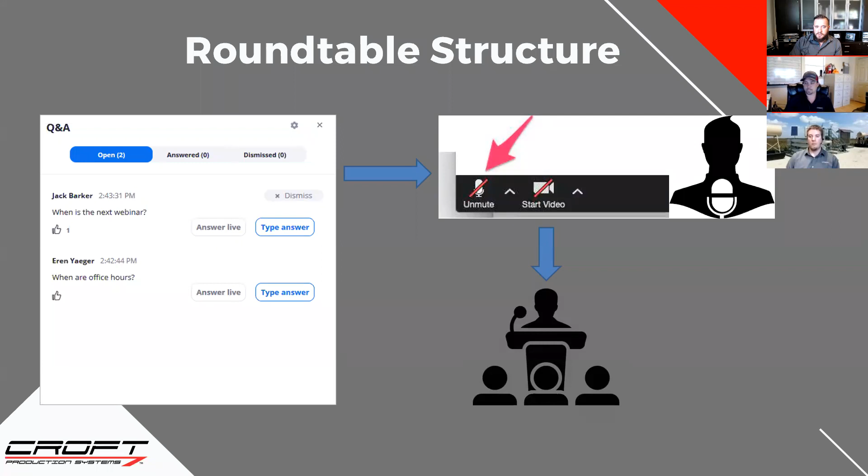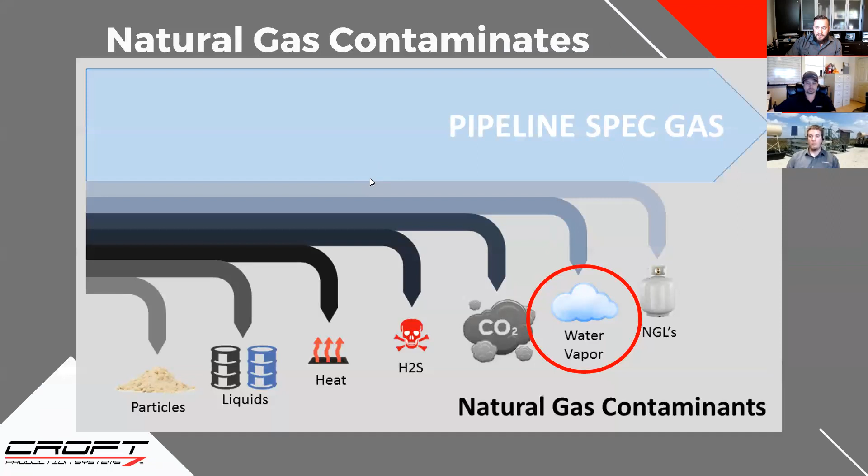The big focus today, out of all the pipeline spec contaminants that we're looking at, is the water vapor - the dehydration portion of it.

Now, the origin story - I'm going to talk a little bit about that because it actually comes from my dad, and I could riff on him a little bit stronger than most. So what he did is he was a consultant. He owned multiple wells, and he was a consultant over 100 wells. So he owned and operated as a consultant.

There's got to be a better way of doing this. At that point, my dad was trying to find a better way of dehydration where it didn't require burners, pumps, all the headaches that go along with it.

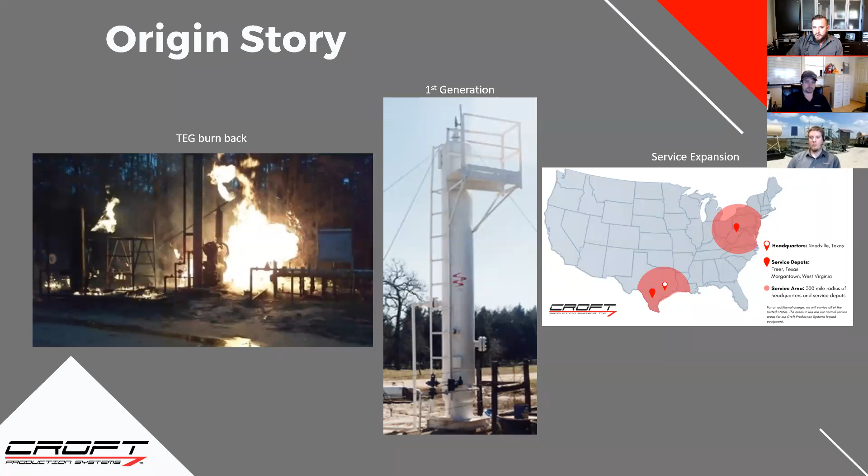So there's different varieties. The trailer one was a fun project, and we're building multiple of those. So yeah, talk a little bit about that.

Yeah, the trailer one, that was an interesting fuel gas project. Up north, the gas quality is really good, and can be used directly into natural gas powered engines. So they just need to make sure that it's dry so that when they run it through the regulators, it doesn't freeze up. These units were designed for drilling rig fuel and dual fuel frac spreads. The trailer would be brought in, it would clean up the gas to power the generators for the drilling rig, then the drilling rig would leave and the frac spread would come in, and we were dual fueling the frac spread to displace diesel costs, which is a great way of saving a lot of money on diesel. But these systems work really well for fuel gas.

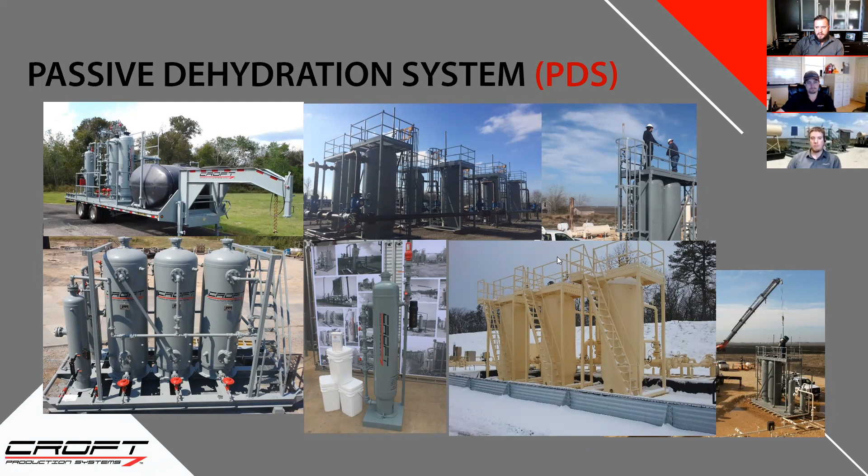Well, let's go into how it works. Yeah, Chris, if you can kind of take the lead on that, and then Eric especially on the service side, because you're the one that has to chew on it most of the time.

Yeah, so the basic function is we're filling up a vessel with a dry pellet. It's about the size of a large almond, and it's made of a mixture of different salts. It's not table salt—there's a little table salt in there, but there's different kinds of salts, and all of the salts like to absorb water. The kind that we use likes water more, but basically we're sucking the water moisture out of the natural gas with these salt pellets, and the salt is going to absorb that water. It's going to start dissolving the pellets, and it's going to collect as a brine water solution in the bottom, and the gas basically comes in the bottom wet and leaves the top dry.

Now the product that we have is formulated to output about 2 to 4 pounds at higher pressures. So when the gas comes in at whatever water concentration it is, it's going to leave at around 2 to 4 pounds per million of water leaving the system. Basically, it's just going to keep eating away at that dry bed of product, shrinking down as it gets eaten up. And then the service team comes and refills it, normally on a 30-day service schedule, to top it off as however much is needed.

But they're very simple systems. There's nothing to turn on or start up or really anything. As soon as the gas starts flowing through there, it goes through the system. Basically, once you've purged out all the gas out of the system, you're drying. And it's very quick, very simple systems. And as long as you have EnviroDri in there that hasn't been contaminated, then you're going to be drying your gas.

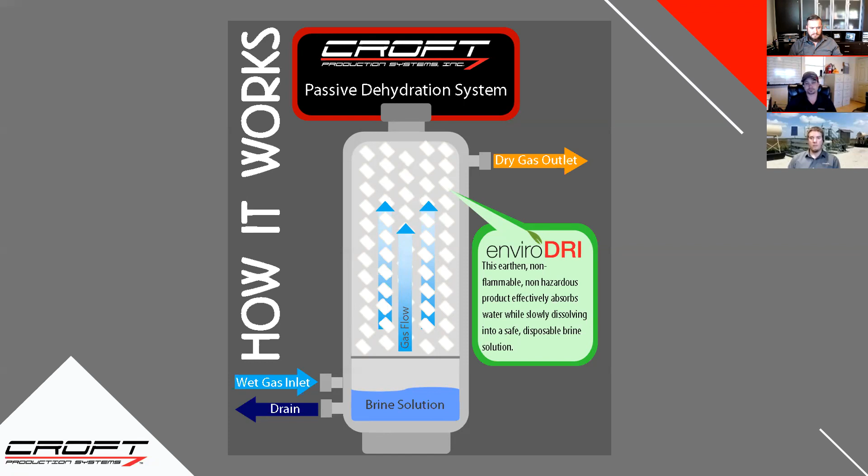That's awesome. So let's go deeper into the actual desiccant itself. I know earlier you were talking about some salt product being in there. We have a lot of clients that just call them salt beds. Can y'all explain a little bit about what it actually is in EnviroDri, and that it is salt, but not everything is salt? Yeah, so it's a mined salt that's refined. And it's mixed with a couple different kinds to give us the blend that we're looking for. We also have it shaped to what we feel is a really effective shape to reduce things like channeling and bridging within the system. So that gives it kind of like an oval shape, round pellet that the gas will go through.

The real benefit of it is that it really only wants to absorb water. So that's the only thing that's going to dissolve the actual salt is water. We've gotten slugged completely with oil, and we just have to drain the system out and it's ready to dry again. That's not going to actually dissolve the pellets unless there's a bunch of water in the oil, then you're going to actually have some of that dissolved. But it really is just looking for the water.

So if the gas is coming in partially dehydrated, it's only going to react to however much water is coming into the system. Your consumption is completely based on the water going into the system. If your volume gets cut in half, your EnviroDri usage gets cut in half. If your temperature gets cut in half, your EnviroDri usage will get cut in half. So it's very simple in the way that it works.

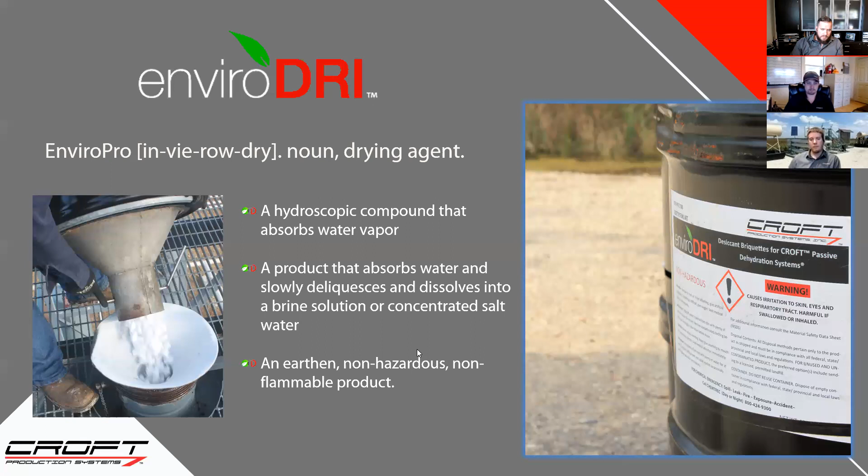No, that's good. And I'm going to move on to the pros and cons. These are the quick highlights of pros and cons. Chris, can you go over them?

Sure. The main pro is it's very simple. Basically, you open the valve, flow gas through it, and you start drying. Usually it's about 15 minutes before we pull a tube, just to make sure all the gas gets out of the system. Normally we're around 6 to 8 feet per minute through the vessel, so it can take a few minutes just to get through our PDS vessel.

But yeah, they're super simple. It's really just the vessels ahead of it, and then the dump system to dump the liquid off. There's no burners, no pumps, no temperature controllers, no back pressure regulators, no low pressure separation systems, no filters, unless you have a coalescing filter ahead of it. The simplicity compared to a glycol unit is night and day. The simplest of our systems is just a single vessel with a dump timer and a dump valve, versus a glycol unit with all its pumps, controllers, and everything.

The lifespan of the vessels is great, it's just a solid high pressure vessel. Our entire lease fleet is 1440 pressure rated, so they're good 25, 30-year life vessels. Even though we have salt inside the vessels, we do not see excessive corrosion inside the systems. We do periodic UT testing depending on the life of the vessel and how long it's been in the fleet, and that salt does not cause any sort of excessive corrosion inside the systems. We use standard carbon steel vessels and don't see any problems. The big problem is if you have oxygen coming in, but that shouldn't be an issue, or else you're going to corrode out everything anyway.

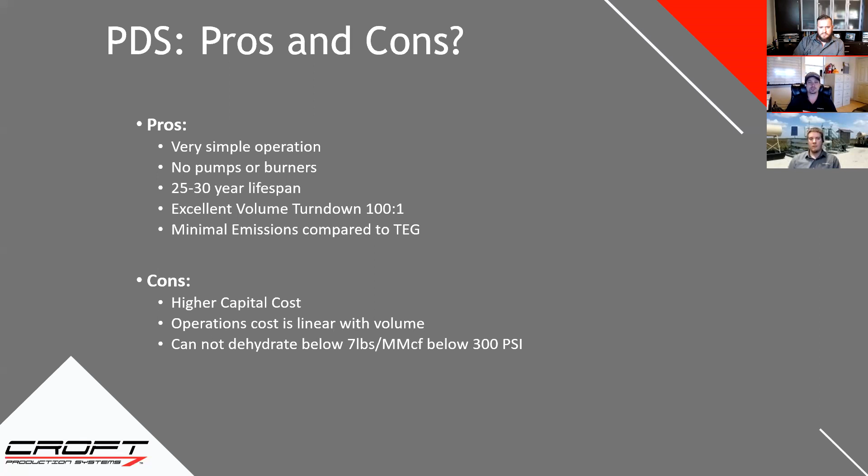Well, it leads back into our desiccant myths. These are the 3 main areas we see a lot, because we get a lot of clients who say, I've dealt with these salt beds since the 1970s, 1980s, and this is what I have. So in dealing with these desiccant myths, Chris, do you mind reading these off and giving your rebuttal? Yeah, so the first one you hear a lot is that they're only really good for low volumes.

Part of that is because the biggest market for these was fuel gas. So if you haven't seen ours, but you've seen somebody else's desiccant system that uses a consumable desiccant, what you've probably seen is a little small fuel gas cylinder on a line heater or GPU or something like that. That kind of gave people the idea they didn't want to change them out that often - they were just a little more unsure of them. So it gave rise to the idea that they were really only good for low volumes of gas.

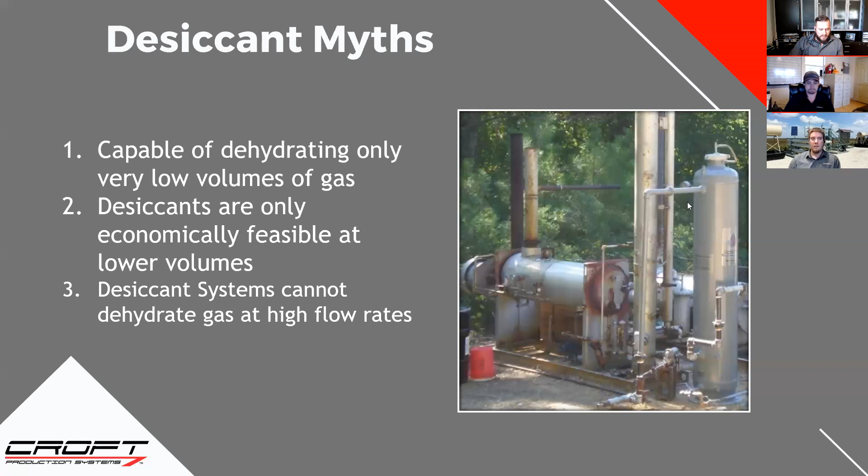That's what I want to do, go into methane emissions, because that's one of the key trends happening right now. Everyone's pushing for ESG, environmental and social governance programs and initiatives, being the Paris Climate Agreement, trying to get back on schedule to meet it. So I started researching ESG, figuring out how people are even gauging the initiatives they need to focus on.

They kept referencing the EPA. So looking at the EPA, whether you believe the numbers or not, this is what they're pushing out there: 12 billion cubic feet of methane being released from dehydrators and pumps. Now pumps, in what sense? I don't know, is that the pumps on the TEG, or chemical injection pumps? They're not really specifying. But I wanted to bring attention to this, because this is what everyone's having in the back of their mind. So politicians, regulators, people legislating, this is what they're seeing as what they need to be focusing on.

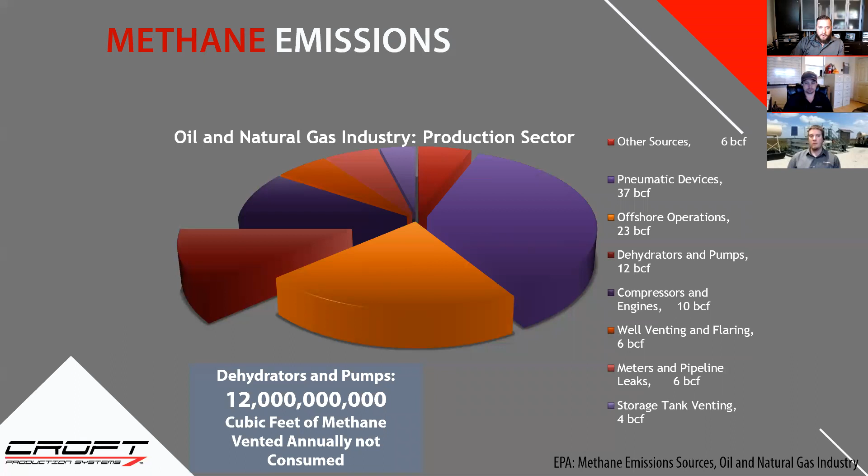So whether it's right or wrong, this is what they're starting to believe. Now, we build TEGs, we recertify them, we service them, so I don't want to talk too badly about them, but I do want to go into the issues, the inefficiencies from them. So Chris, can you go into that, and then Gorka on the service side?

The emissions from the glycol systems, all the bad stuff comes out of the still column. The burner is just a burner, burning the gas. The efficiency of the burner could be 95, 98%, whatever that style of burner is, so you do have a little bit of methane emissions from that, but overall that's not a big number. You do have your fuel usage equivalent to your burner, and your circulation rate can be kind of high—you could have 5 to 10 MCF a day depending on the size of the glycol system, and 2, 3, 4, 5% of that methane just getting emitted because it didn't get full combustion.

But the main emissions come off that still column—that's assuming your flash separator is going someplace safe. If you don't have a flash separator, you have a lot of methane getting emitted off your pumps, but all the bad stuff is in the still column, because it got captured by the glycol.

Your benzene, your toluene, your ethyl benzene—these are all hydrocarbons in the gas. Glycol likes them, so it grabs them in the tower and takes them to the still column where they get boiled out. Benzene, toluene, that's basically paint thinner—it's a hydrocarbon light enough to be in the gas but heavy enough to get captured by the glycol. When that gets boiled out, if you don't have a good BTEX unit to capture and remove them, sending them someplace other than venting to atmosphere, like a combustor, or liquefying them into a tank, then you have an emissions problem. The standard glycol or BTEX system, just the ambient cooled ones, are just liquefying what they can.

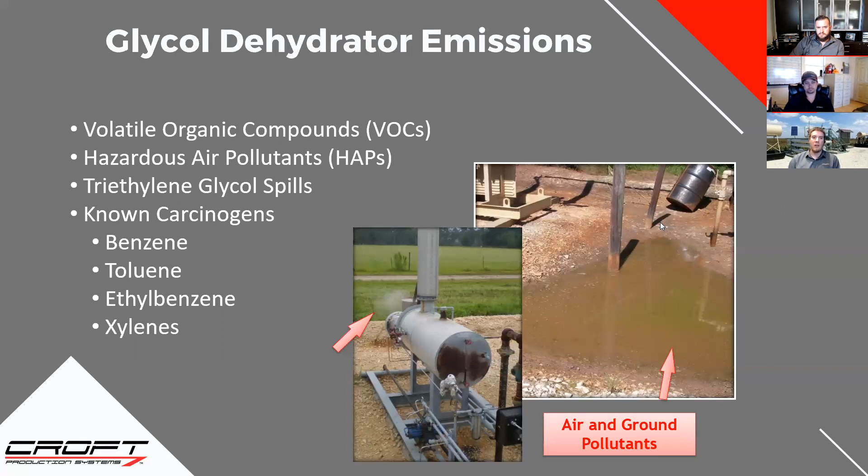That goes into the big push for our glycol systems being replaced with our Desiccant PDS passive dehydration system—it's the simplicity, the air permit issues, and people not wanting to spend the money on the upgrades that they're seeing.

What are you seeing on that? Explain what y'all are seeing from your clients, especially with the ESG initiatives.

Yeah, we see a lot of replacement of oversized systems—systems that were initially sized for an initial flow rate that declined after 3 months and is no longer anywhere near what that big unit was designed for. We see that a lot.

A lot of our clients are the second or third owner of the locations. So the original glycol system, maybe getting 10 years old, insulation's fallen off, it had a small fire—they don't want to spend the money to fix it.

So they can get our unit designed for a smaller volume to completely replace that system. Maybe they can take that asset and put it somewhere more usable—take a dehy sized for 20 million and put that on a new well pad, and the old well pad can get our rental system they don't have to worry about. We have a lot of operators that love our units because, you know, the pipeline says, hey, you're reading a 7, and they're like, okay, they call Croft, they call Eric, and he sends one of his guys out there.

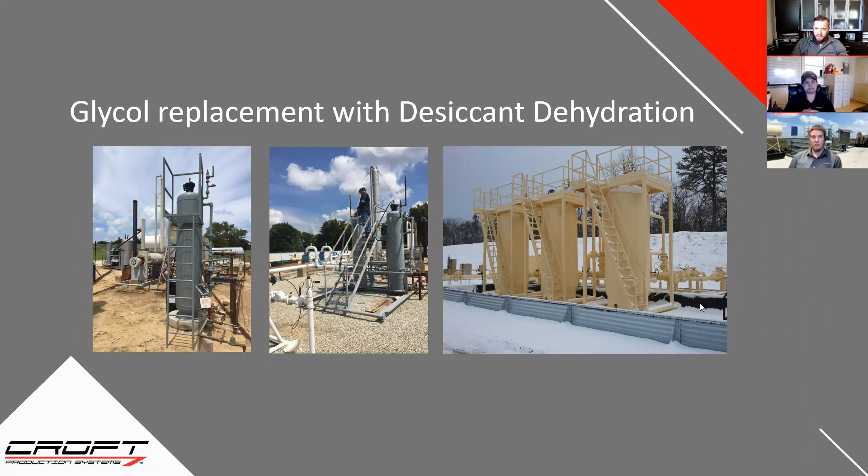To stay on schedule, we're going to skip a few things. I think I got a little ambitious with the presentation, so we're going to go into the case studies. But before we get into the case studies, we do have a question.

Where do you take the brine water once it's dumped? So the brine water is chemically the same as produced water, so we just normally send it to the saltwater tanks on location. It doesn't add any special disposal requirements or anything. You can't even tell it's mixed in, it looks exactly like produced water. So it just goes to wherever the water is going for disposal.

Here in Texas, there's always a saltwater disposal well that it's going to go to, but most sites have a saltwater tank, oil tank on site, and we just pipe into that. Normally we like our own dedicated drain line all the way to that tank if possible. Really, we just want to get into a line that has other water in it, that way the salt water can't solidify. If it sits too long, there's a chance if it gets cold enough, it can re-solidify into salt crystals.

But yeah, it's the same as produced water, and we're not making a lot of it. So most of our clients don't even notice, unless they don't make any water at all, that we're adding water to their tank.

Well, going into the case studies, let's talk about the top one and go through explaining these scenarios. So the first one is the Colorado application, right, Eric? Yeah, I guess you can talk a little about this one. I think you actually visited this one, right? No, I didn't get the chance to go to Colorado on that trip, but hey, we shipped you to Louisiana. I mean, it's kind of the same thing as Colorado.

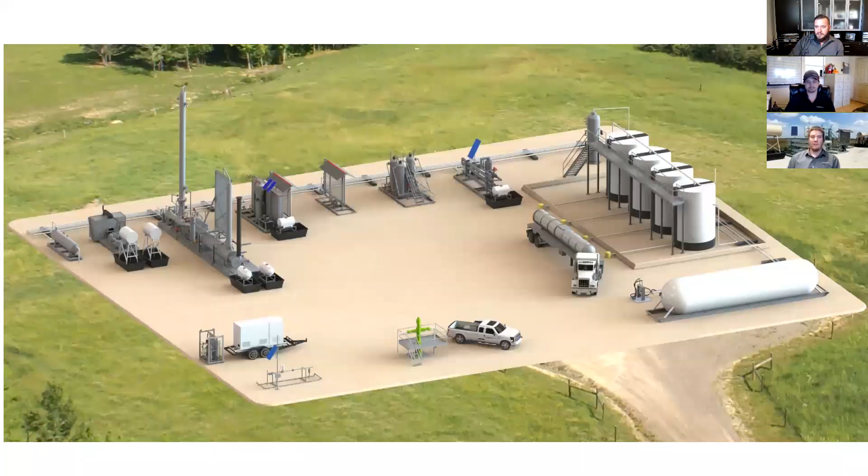Oh, absolutely. All right. Take care, guys. Thank y'all very much for everyone joining us.